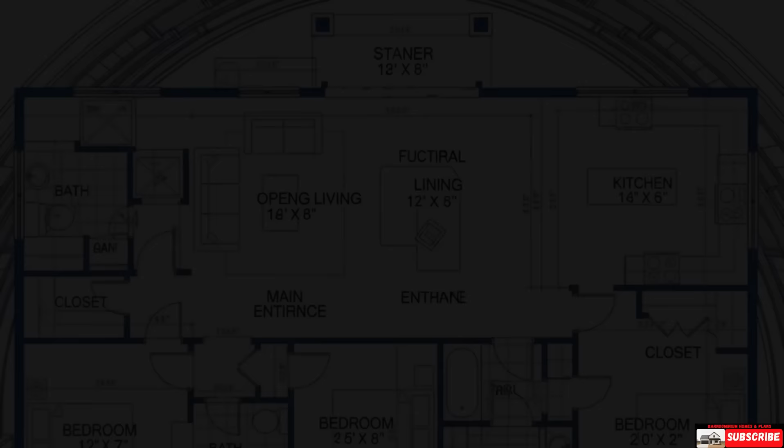Now let's start with Plan 1. Plan 1, the compact starter. This is a 30 by 40 foot S-model Quonset, totaling 1,200 square feet of finished living space. Total build cost estimates $110,000 to $135,000 complete.

Blueprint layout. Simple rectangular footprint with a curved Quonset arch running lengthwise. The plan divides into 2 bedrooms, 1 bathroom, and an open concept main living area comprising 60% of total space. Bedrooms are positioned along one side wall where ceiling height is 8 to 9 feet. The center area with maximum ceiling height houses kitchen, dining, and living.

Exterior design. The S model features straight 10-foot sidewalls with a curved arch roof overhead. Metal corrugated siding in tan or gray wraps the structure. One end wall has the main entry door with 2 flanking windows. The opposite end wall can accommodate a large garage door if desired. Small covered entry overhang provides weather protection. The curved roofline creates a modern industrial aesthetic.

Living room. The open living area spans 400 square feet under the 16-foot arched ceiling. Large windows on both end walls flood the space with natural light. The dramatic curved ceiling overhead creates architectural interest. Polished concrete floors keep costs low while looking modern. Space accommodates standard sectional sofa, entertainment center, and dining table for 6.

Kitchen. Open to living room. The kitchen features 12 feet of counter space along one wall with stock cabinets above and below. Laminate countertops and modern patterns provide function at budget price. Standard stainless appliance package includes refrigerator, range, and microwave. Small island adds prep space and casual seating. Open shelving on opposite wall provides pantry storage while maintaining openness.

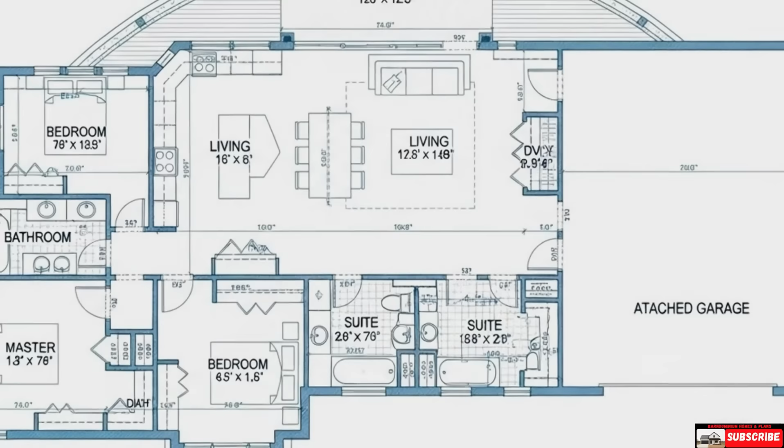Plan 2. The family layout. This 40 by 50 foot Quonset provides 2,000 square feet with 1,400 finished as living space and 600 as attached garage. Estimated cost $130,000 to $150,000.

Blueprint layout. Divided into thirds lengthwise. Front third is 2-car garage with concrete floor and overhead door. Middle and rear thirds comprise living quarters with 3 bedrooms, 2 bathrooms, and open living area. Master suite occupies 1 corner. 2 additional bedrooms share hall bathroom. Exterior design. Full arch Quonset with curved profile from ground to peak.

Charcoal gray, corrugated metal siding. Front end wall features a large garage door on the left and a standard entry door on the right with two windows. The rear end wall has larger windows for living spaces. Simple, functional exterior focused on cost control. Landscaping and shutters can enhance appearance later.

Living room: the central gathering space of 350 square feet beneath a soaring 18-foot arch ceiling, with large windows on the back wall. Open to the kitchen, creating 600 square feet of combined space. Concrete floors throughout, with an exposed ceiling and painted metal roof deck adding character while saving on drywall cost. Room for a large sectional, TV console, and dining table for 8.

Kitchen: L-shaped layout with 18 feet of counter space. Stock white cabinets with laminate countertops. Full appliance package, including dishwasher, in this larger plan. A peninsula separates the kitchen from the living room, providing breakfast bar seating. Walk-in pantry, 5 by 6 feet, built in a corner. Budget of $18,000 for the complete kitchen.

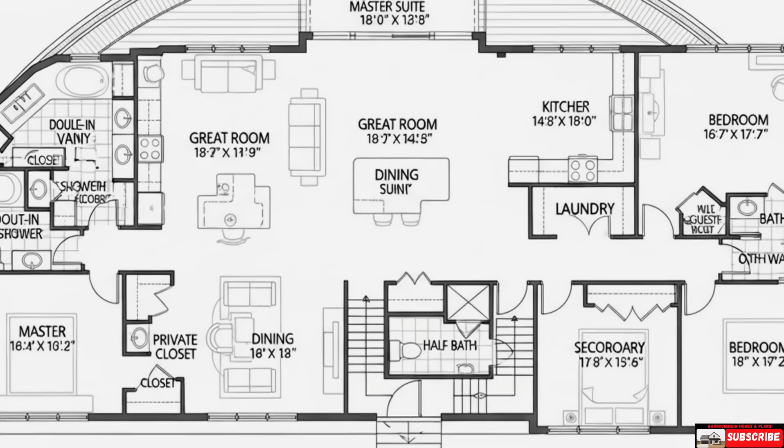Secondary bedrooms: two additional bedrooms at 10 by 11 feet each, 110 square feet, located along the curved wall. Each accommodates a full or queen bed with a small dresser, with standard closets. They share hallway access to the second bathroom.

Master bathroom: 8 by 9 feet, 72 square feet. Walk-in tile shower with glass door. Single vanity with laminate top. Standard toilet. Vinyl plank flooring. Upgraded lighting. Budget approximately $9,000.

Hall bathroom: 7 by 8 feet, 56 square feet. Tub shower combo, single vanity, standard toilet and finishes. Serves the secondary bedrooms.

Budget $6,000. Garage: 20 by 30 feet, 600 square feet. Accommodates 2 vehicles with extra storage. Concrete floor, exposed metal walls. Can be finished later as additional living space or workshop.

Plan 3: The Open Concept. A 40 by 60 foot S-model Quonset totaling 2,400 square feet, with 1,600 finished. Cost estimate $140,000 to $150,000 with DIY work.

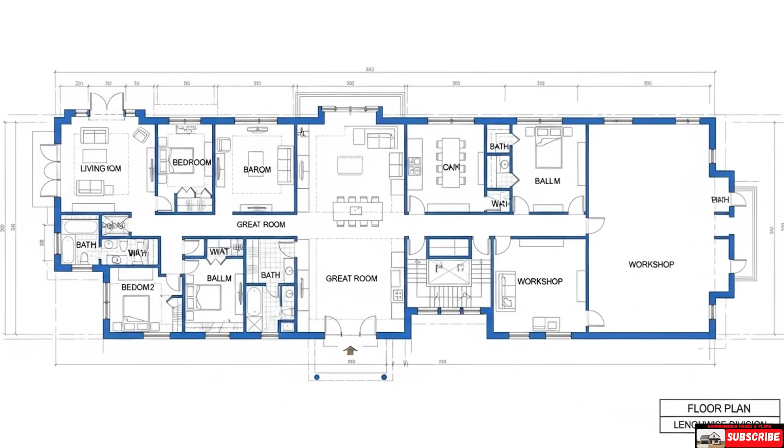Blueprint layout: a lengthwise division creates 1,600 square feet of finished living space and 800 square feet of unfinished shop. The living area features 2 bedrooms, 2 bathrooms, and a massive open great room. The shop area is accessed through an interior door for convenience.

Exterior design: S-model with 12-foot straight walls and arched roof, giving a more conventional appearance than a full arch, with vertical metal siding panels. The front features a large entry door with side lights and transom. Multiple large windows on the living space end wall. The shop has a 10 by 10 overhead door. Professional appearance suitable for residential neighborhoods.

Living room: an expansive 600 square foot great room under a 20-foot vaulted arch ceiling. Floor to ceiling windows on one end wall create dramatic light. Open to kitchen and dining. Concrete floors polished with stain. Exposed wood beams accentuate the arch. This is the showpiece space where the Quonset design truly shines, with room for a full living room set, large dining table, and conversation areas.

Kitchen: large U-shaped layout with 24 feet of counter space. Stock cabinets in gray with white quartz-look laminate counters. Full-size island, 4 by 8 feet, with seating for 4. Upgraded appliance package. Walk-in pantry with custom shelving. Budget $22,000. This kitchen rivals traditional homes.

Master suite occupies one corner at 14 by 16 feet, 224 square feet, with 10-foot ceiling height where positioned. King bed, seating area, and large dresser all fit comfortably. Two windows. Walk-in closet 6 by 8 feet with built-in organizer. Direct access to master bath.

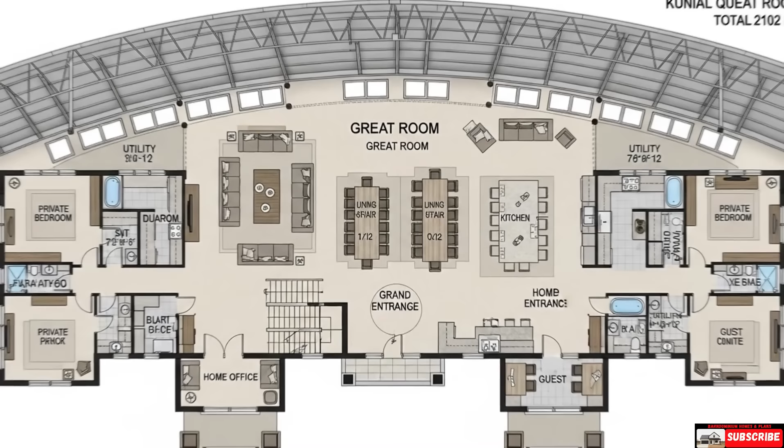Master bathroom: luxurious 10 by 11 feet, 110 square feet. Large tile walk-in shower with bench and dual heads. Freestanding soaking tub. Double vanity with laminate tops. Upgraded fixtures and lighting. Vinyl plank flooring. Budget $12,000. This bathroom is a standout feature.

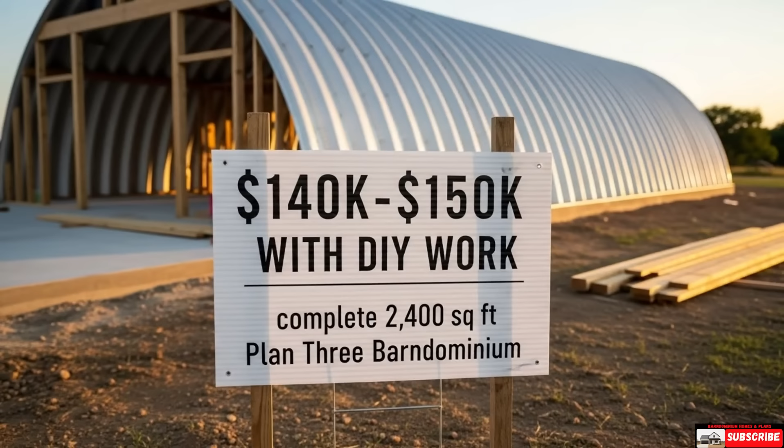Guest bathroom: 8 by 9 feet with shower-only configuration, single vanity, modern finishes. Budget $7,500. Shop space: 20 by 40 feet, 800 square feet.

Unfinished with concrete floor and metal walls, perfect for vehicles, tools, and projects. Access from an interior door for convenience. Can be finished later to expand living space.

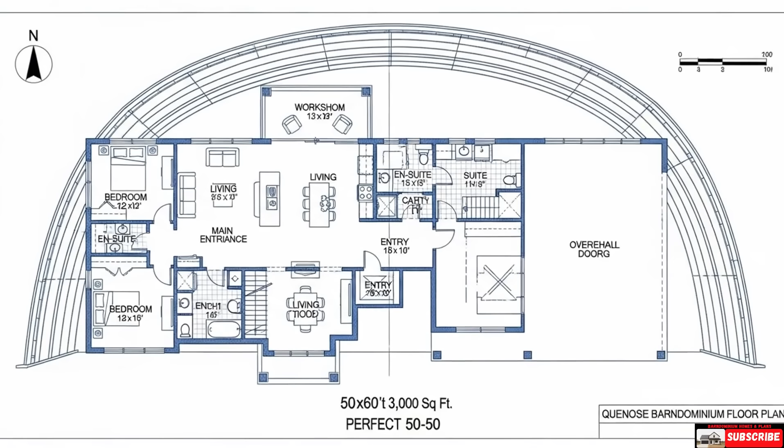Plan for the Workshop Combo. A 50 by 60 foot full arch Quonset totaling 3,000 square feet. Living area 1,500 finished, shop 1,500 unfinished. Cost $145,000 to $150,000 with extensive DIY.

Blueprint layout: a perfect 50-50 split. Front half is a 3-bedroom living quarters with 2 bathrooms. Back half is a workshop with 14-foot ceiling clearance and large bay doors. Exterior design: classic full semicircular Quonset arch, industrial aesthetic with corrugated metal throughout. One end wall is the living space entry with residential door and windows.

Opposite end wall has 2, 12 by 14 foot overhead doors for shop access. Side has a man door between sections. Functional design, prioritizing utility over ornamental features.

Living room, 400 square feet with 16-foot peak ceiling, connected to kitchen and dining. Standard window arrangement, polished concrete floors. This plan focuses on providing substantial shop space, so living quarters are comfortable but not elaborate.

Kitchen. Galley style with 14 feet of counter on each side. Stock cabinets and laminate counters. Standard appliances, small eat-in area. Functional workspace. Budget $16,000.

Bedrooms: 3 bedrooms at 11 by 12 feet each, 132 square feet, all positioned along curved walls with 8-foot ceilings. Master has adjacent bathroom; 2 secondary bedrooms share a hall bath. Master bathroom, 8 by 8 feet, shower only, single vanity, budget finishes.

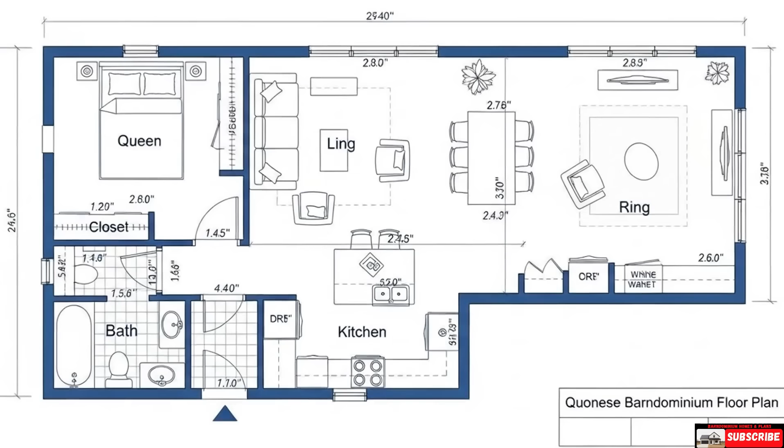Plan 5: The Efficiency Studio. Smallest plan at 24 by 40 feet, totaling 960 square feet finished. Estimated cost, $90,000 to $110,000. Blueprint layout: studio style with 1 bedroom, 1 bathroom, and completely open main area.

Most affordable Quonset Barndominium option. Exterior design: compact S model with straight walls and arched roof. Single end wall entry, minimal windows to control costs. Simple metal siding, perfect for building on a tight budget or small lots.

Living area: 550 square feet of combined kitchen, dining, and living under a 14-foot arch ceiling. Completely open with no dividing walls. Large windows on one end. Concrete floors. This plan embraces minimalist living.

Kitchen: 1-wall galley with 10 feet of counter space, upper and lower stock cabinets. Apartment-size appliances: 18-inch dishwasher, 24-inch range. Small rolling island adds flexibility.

Budget $10,000. Bedroom: 12 by 12 feet, 144 square feet, fits a queen bed and small dresser. Standard closet, positioned where the arch provides 8-foot ceiling.

Bathroom: 6 by 8 feet, 48 square feet, compact with corner shower, pedestal sink, standard toilet. Tight but functional. Budget $4,000.

Special features: this plan delivers homeownership under $100,000 when built DIY. Perfect for singles, young couples, or retirees downsizing. Can always expand later by extending the Quonset structure.

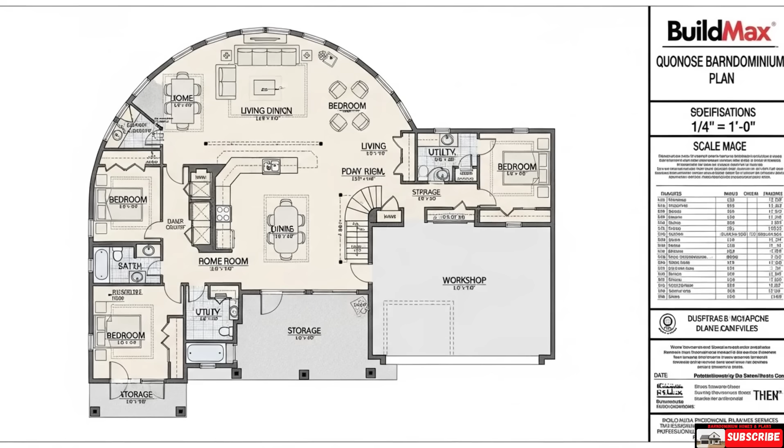BuildMax offers Quonset-specific floor plans for $1,300 to $2,000. Their plans are engineered for curved structures and include all necessary specifications. They also connect you with builders experienced in Quonset construction.

Steel Master Buildings provides free basic floor plans with kit purchases. Their design team helps customize layouts to your needs. Engineering is included for your specific location.

Generic Barndominium plan websites like Architectural Designs, houseplans.com, and Barndominium Floor Plans have some Quonset designs, though they are less common than traditional layouts. Local metal building companies often provide free floor plan services when you purchase their Quonset kit. This is worth exploring in your area.

The key is working with plan providers who understand Quonset structures. The curved walls and arch ceiling require specific design considerations that traditional Barndominium plans do not address. I recommend getting plans that include detailed construction drawings, electrical layouts, plumbing schematics, and building specifications. This ensures your builder can execute the design properly and your project passes inspections.

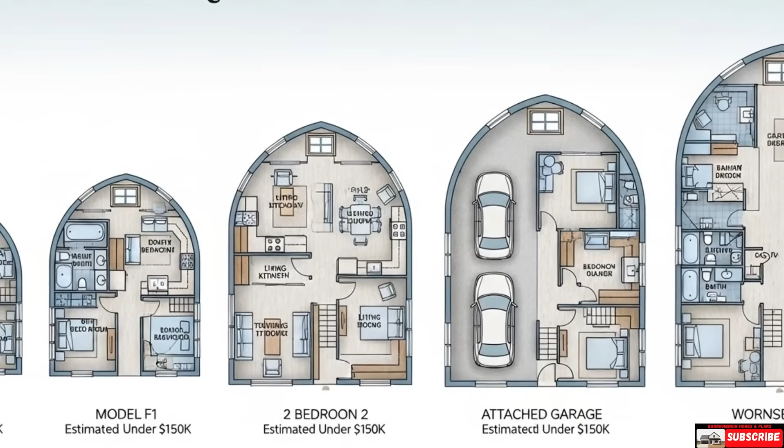These 5 Quonset Barndominium plans prove you can build beautiful, functional homes under $150,000. From the 960 square foot studio to the 3,000 square foot workshop combo, there's a Quonset design for every need and budget. The common thread in all these plans is efficient use of space, smart material choices, and taking advantage of the Quonset structure's inherent strengths. The curved arch creates dramatic ceilings without added cost. Clear span interiors give complete layout flexibility, and the prefabricated nature keeps construction costs manageable.